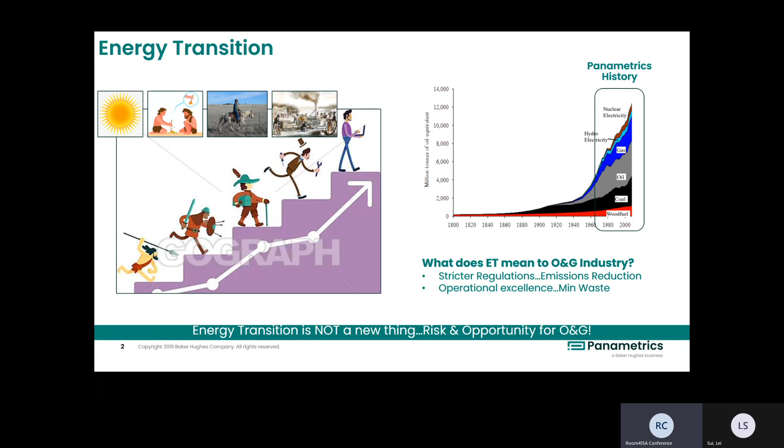That's exactly what I think flare.IQ can offer. As I said, by training, by nature, I'm not a salesperson, but I try to go through what's in my mind from a technology point of view. Next slide. Yeah.

So if you go to the website and search, those big buzzwords are all over the place. Climate fight, carbon footprint, and methane reduction. So on one hand, when we think about energy transition, we are thinking, hey, natural gas is going to play a bigger role moving forward.

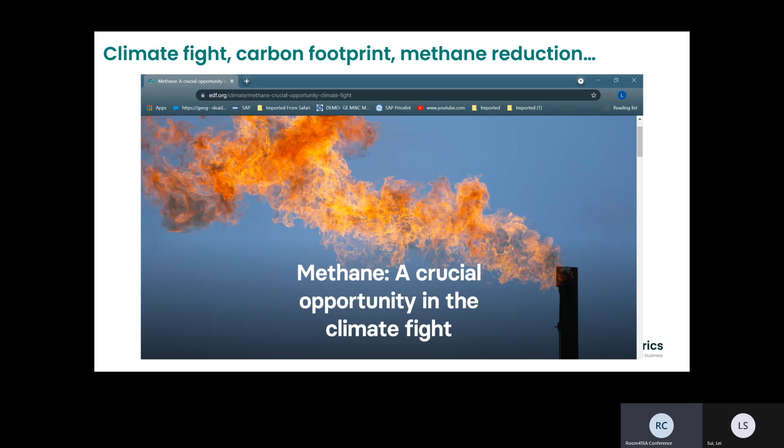On the other hand, we also think methane, that's bad. Well, we realize it's bad for a long time. It's just never to this order of magnitude, right? So what does that mean? So next slide.

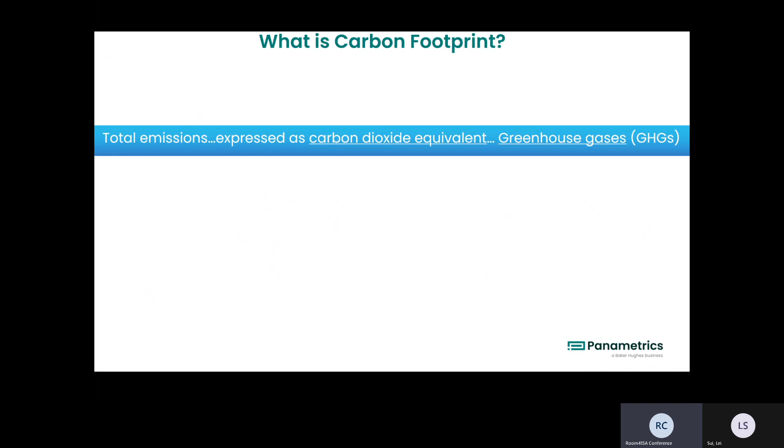So why are we saying a certain thing there, right? So I think that's really come down to the carbon footprint. And I think the carbon footprint is really the total emissions expressed as carbon dioxide equivalent, right? The major carbon footprint source for us is carbon dioxide and methane.

Methane is the major part of natural gas, basically, right? So when it comes to warming the planet, methane is much worse. In other words, methane has a much more warming power compared to carbon dioxide. Carbon dioxide is bad by itself, but this is at a different level, methane. That's really important for us to understand.

So it's 80 times more warming power compared to CO2 over a 20-year period, right? So then you think about where the greenhouse gas is coming from. Carbon dioxide is really 80%, and the methane is only 10%. But when you multiply by 80 times, or even 20 times, depending on the number of years you are looking at, methane is becoming a major problem.

That's why you read the news, so methane is bad, bad, bad. And there's a reason for that. Where does methane come from? There's many different sources of methane.

So right, natural gas, oil and gas industry is 31%. That's the largest. Then you think about enteric fermentation - that's the cows, the farms, the cattle, right? So that's why you read the news about reducing the consumption of meat, right? That's also part of that. There's landfill and other things there I'm not going to talk about. So oil and gas is focused here, right?

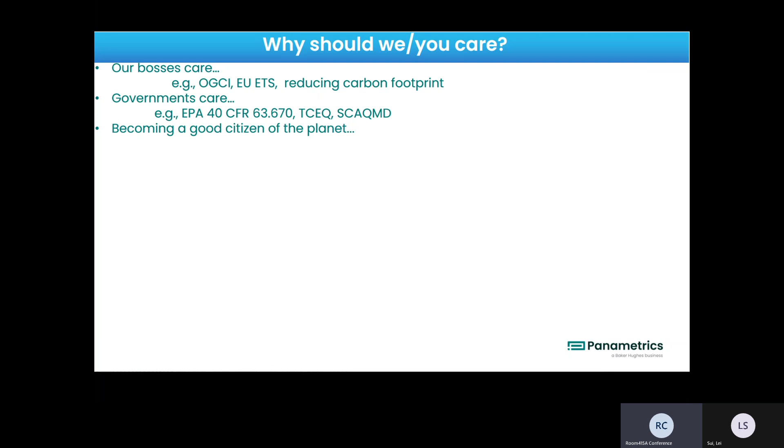So why should we care? Regulators and government really care about this. I'll reference some regulations there - MACT rule, TCEQ, different rules. You can read it yourself. I think everything comes down to how that's related to a flare system. That's what we are going to talk about today.

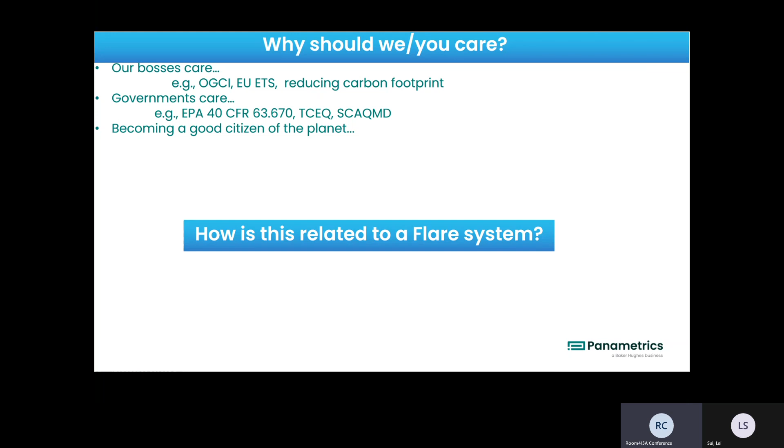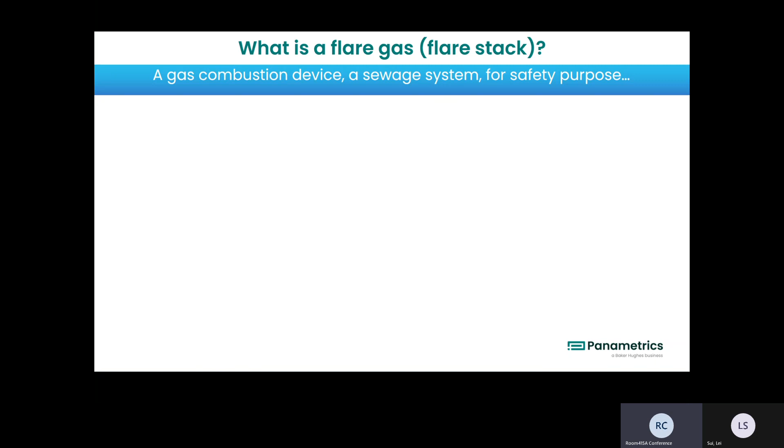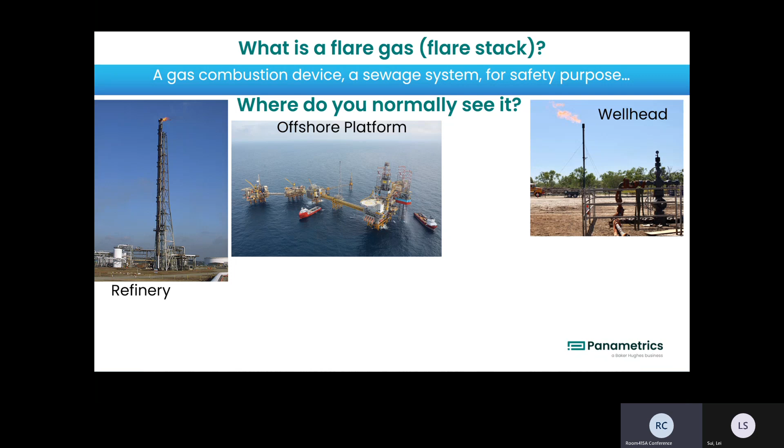If you think about it, a flare stack is really the sewage system of the refinery or petrochemical system. It's where anything you don't want goes, and eventually it will be burned. Where do you see that? Refinery, petrochemical, offshore platform, wellhead - that's the upstream thing we talked about. And keep going - chemical, and also LNG.

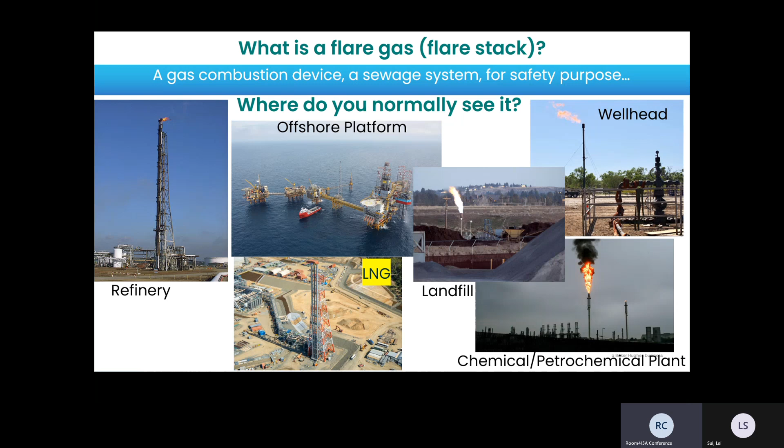Last time we also talked about pipelines, and Golden Pass, the LNG facility. There's one common theme - when it comes to those, and landfill is another one - they all produce methane one way or another.

So going down further, when you produce methane, there's only a couple of things to consider. If you think about methane as an equation, this is the schematic for an oil and gas plant, whether petrochemical or offshore - pretty much summarized like that.

You start with some raw materials - for refinery, it's crude oil. Then you go through different processing units, whether for jet fuel, gasoline, diesel, different things. Eventually those smaller flare lateral lines combine to a main header. You go through a knockout drum, flashback seal, all the way to the top, where you burn anything at the flare top.

That's the schematic. The reason I highlighted this is that's where the methane comes from - methane sources are from different processing units combined, and you also have some kind of purge gas, could be nitrogen, or could be natural gas with methane as well.

There's also part of the pilot - for the flare top, you need a pilot light, and you need to supply fuel gas to burn that. So all those are the sources there.

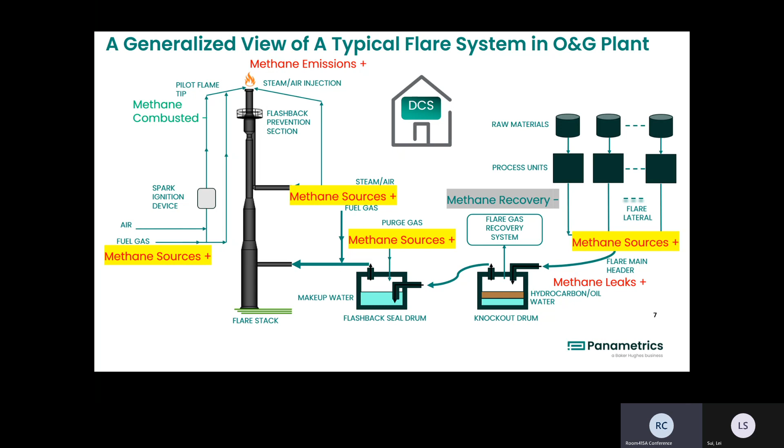So where is that methane going to go? A few things - it can leak, like from a valve that's leaking, then you're going to see some leak. And then also at the flare top, you are going to burn that.

So this is really how methane is balanced: the source minus the flare gas recovery system, if you have one - not every facility has one - then it will be burned, and anything left will be the methane emissions.

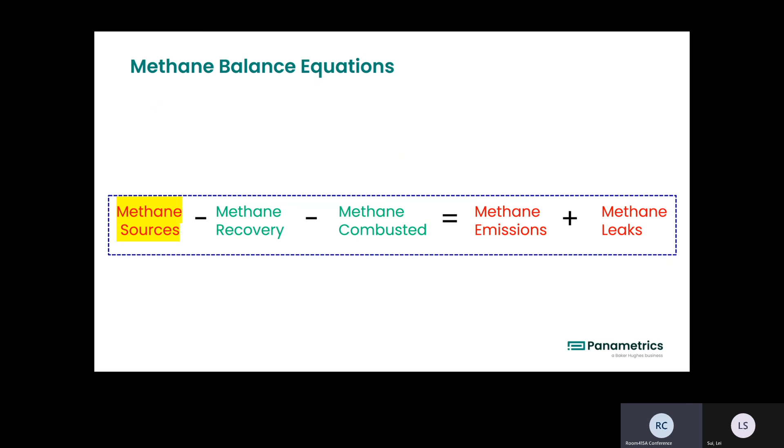Next, if you think about the combustion, it's pretty straightforward - methane is burned to become CO2 and H2O. As I mentioned earlier, this is bad enough by itself. If you are not burning that, it's much worse because of methane. If you're not burning it, basically it will escape to the air.

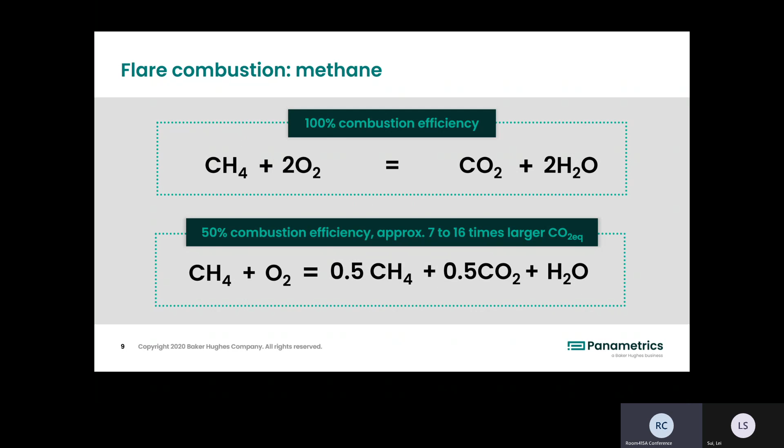Suppose you have 50% combustion efficiency, which really means 50% of methane goes to the air directly, and the other 50% will be burned. When you combine those two, that really means your warming effect on the environment is going to be much worse than 100% combustion. That's why all the regulators are seeking good combustion efficiency - there's a reason for that. If you don't, then that's a problem.

That's really the background. I'm going to skip this one and quickly go through some of the regulation history. There's an expert in the room, so feel free to chime in.

Historically, you can look at the history and say there's two general regulations. One is no black smoke is allowed - that's regulation one. So for operators, whether Chevron or Valero, when they think about this, they say, hey, in order to avoid black smoke, I'm going to inject steam. I'd rather be safe than sorry, so I'll inject a bit more. By doing that, you dilute the energy content inside your combustion zone, and the end result could be you reduce your combustion efficiency.

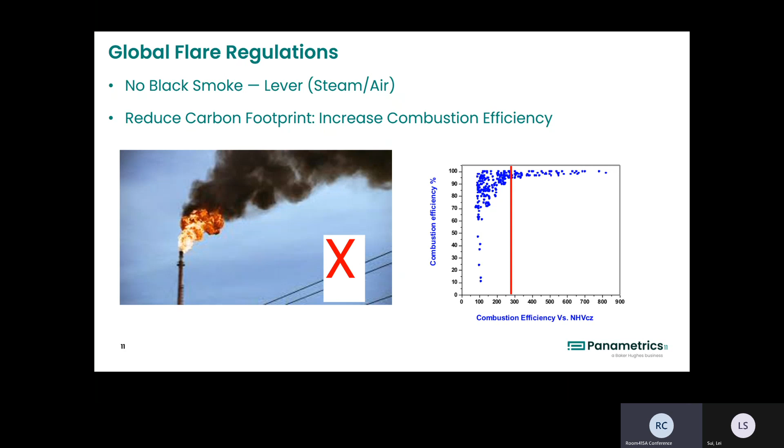EPA recognized that problem. So they said, true, there's no black smoke, but on the other hand, I need to make sure you have enough energy content in the combustion zone. That's where we start to have the RSR MACT rule - not only the other things I talked about, but also making sure you have good energy content in the combustion zone. That's why we regulate that.

The regulation is on the page, you can read it yourself, I'm sure you're all familiar with it. It really tells you a flare must maintain a minimum combustion zone net heating value, 270. That's the history, for refineries. As you all know, MACT is also coming to the petrochemical sector - by 2023, that needs to be implemented there as well.

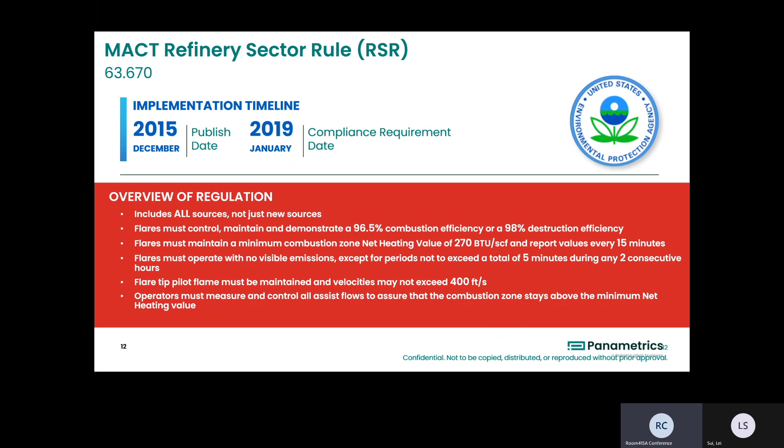So refinery first, petrochemical next. The regulation is very similar there. So that's exactly the journey of our thought process, how we are developing, how we can develop more than a meter and become part of the solution.

That's where flare.IQ comes from. There's 3 messages I want to deliver for flare.IQ. If there's anything you want to remember about flare.IQ, it's that flare.IQ is a platform. The way you think about flare.IQ is like your phone, whether it's an iPhone or Android, doesn't matter. It's your phone, and then given that platform, we build different apps on top of that. There are 3 apps I'm going to introduce today.

One, emissions control, which I'm going to talk about. The second one is called digital verification, which Victor will go through in detail as well. Then the third one will be monitor combustion efficiency. Those are the 3 things, and that's my whole main focus there. So then you'd ask, hey, why does Panametrics have something secret sauce to offer in this case?

I'll start with emission control, which is here. The deal is this: as I mentioned earlier, Panametrics is specialized in flare meter. We do flare metering for the last 40, 50 years, starting in 1980, so that's 40 plus years already. We know quite well how flare is operating at different refinery and petrochemical sites. We can output a velocity, volumetric flow, mass flow.

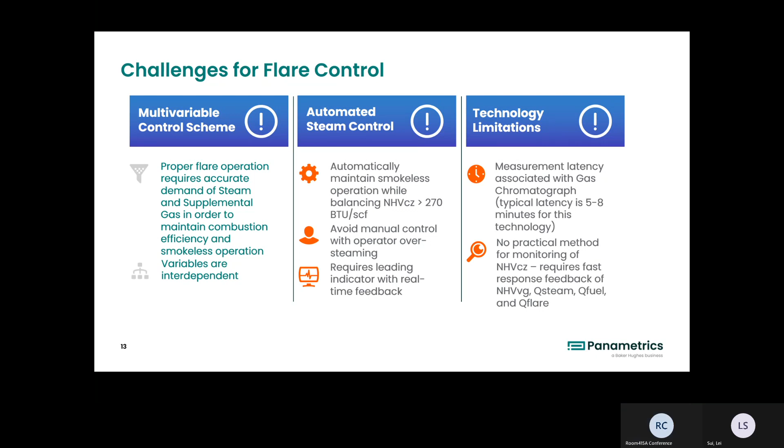So Mike briefly talked about it. Yes, okay, Mike briefly talked about it here. If you think about that, whether petrochemical or refinery, this is how it works there.

But in order to measure, you need to have some kind of feedback. Any control needs a feedback loop. So if your end goal is to make sure the combustion zone has a BTU value of 270 per scf, then how do you know you need to give more fuel gas or more steam? The way to know that is we utilize our molecular weight and derive the BTU value, using that as feedback for our control algorithm. It's much easier for me to say than done, for sure. There's a lot of algorithm IP behind it, but in a nutshell, that's what it is.

So that's why we say, hey Mr. Customer, if you install our flare.IQ into your DCS, we are not controlling any of your valves for fuel gas, flare gas, or steam. What we are going to do is be your advisor, your partner. I'm going to tell you at every moment how much steam you are going to need, how much fuel you are going to need, in order to do two things. One, be compliant. What's compliant? RSR called out the rules, I need to make sure I'm compliant. Secondly, I want to make sure you are very, very efficient to reduce your operational costs.

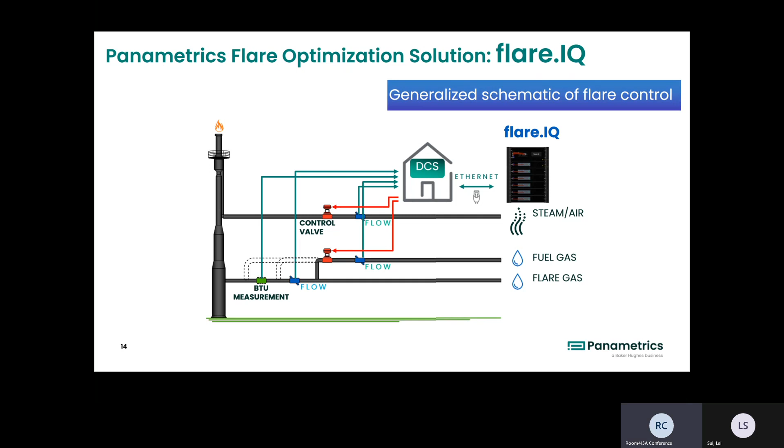Feel free to talk afterward about any details. The second piece I want to talk about is flare.IQ being like your iPhone. We build an app for control. Now how about the second piece? What else can you do with that iPhone? There's a lot of things we can do.

So Exxon, Valero, you buy our ultrasonic meter. Historically, you need to make sure your meter is working properly, so every once in a while you need to go check. Some vendors might tell you that you don't need to do any of that, but that's a dangerous statement. The analogy is like your annual physical check - that's how you know how healthy you are. Do you really want to skip that every year? That's your personal choice, but when it comes to your critical asset, which is our flare meter installed in your facility, how often do you want to do that?

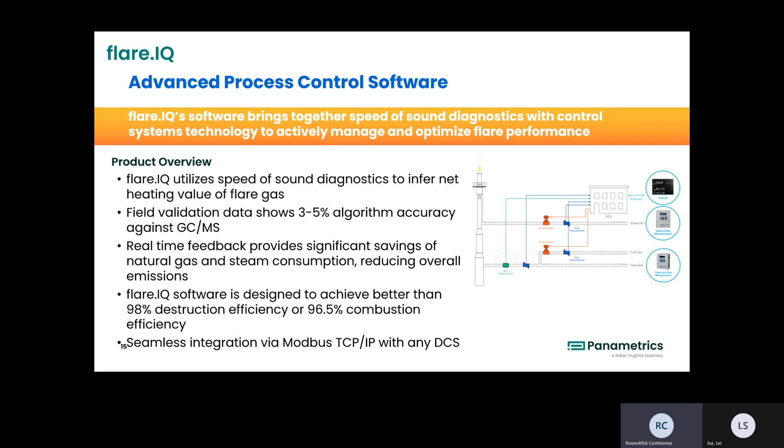Historically, we normally go there and check the meter on site. Sometimes you even need to build a scaffold to access those meters. So using the same analogy, leveraging the flare.IQ platform, now we don't need to do that anymore.

What you need to do is, almost like, hey, I need to monitor your heart rate, blood pressure, all the other things. On the other hand, I collect all that information. There's a pass-fail criteria on this flare.IQ box - there's an app. So for my height and age, 150 pounds is supposed to be the perfect weight, for example. If I'm already 200 pounds, it will tell you, hey mister, you've got a problem. The same analogy applies to our meter.

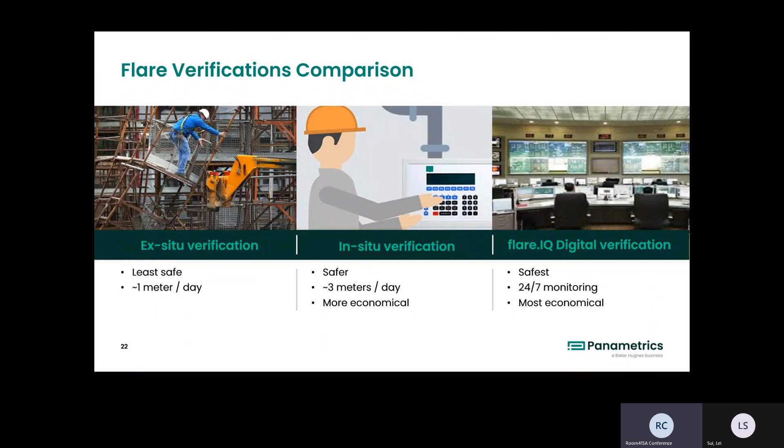So I think basically, let me show one example, go all the way down. I'll show one example of how it works there. More? Yeah, more, all the way more. This is the digital one, right? So I think this one might cover it. Go ahead, next one.

So for example, this is what you are going to see out of our app. This means we know our meter. So for example, if I'm the transducer installed in your pipe, if the background noise is very loud, or my voice is getting weaker, by knowing that, we can say hey, too much noise, so you can't make a reasonable measurement. And this will tell you whether you pass or fail.

In the future, which is not available yet, we want to make sure we can do more proactive, predictive maintenance. So, hey Mr. Customer, in 2 months your transducer might need some maintenance because your signal is really decreasing. But for now, what we can offer is a digital verification so that I don't need to see a doctor - that information will be sent to the doctor. The doctor evaluates me and says, hey, you're good, or there's something you need to do.

Question: Doesn't the existing Panametrics controller have this feature built in, some kind of fault diagnostics? No, but I think the existing meter offers all those diagnostic parameters, like signal strength - those parameters are available. There's just no intelligence algorithm to tell you whether they're good, bad, or otherwise. That's where the app comes in to do that. Good question. And I think that's the digital verification.

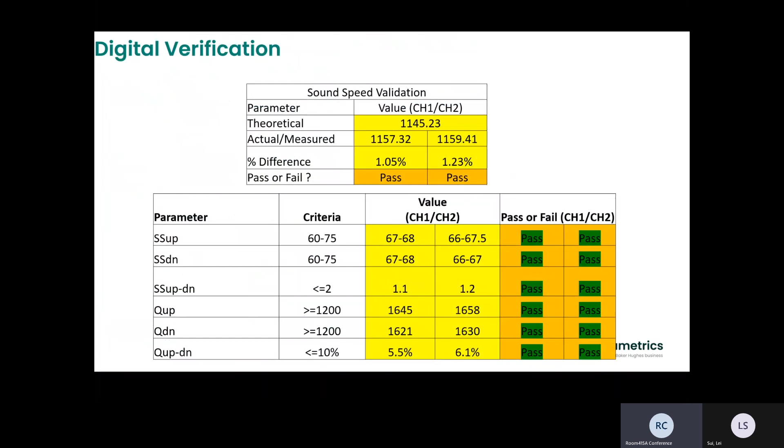Can you go back to the combustion efficiency? So the last feature - I said there were 3 features. I talked about flare control, I talked about digital verification, and this last one I'll talk about now. For upstream, there's no air assist or steam assist, so what can flare.IQ bring to the table? What can we do? Today there's an industry gap. I don't pretend we have a solution or a perfect answer, but I think this is a first step at it.

When you think about upstream flares, like a wellhead, you basically burn whatever comes down the line - there's no air assist or steam assist. So the real question is, how do you know how efficient you are at burning that waste gas coming to the flare pit? The answer is, we don't know. As an industry, we don't know. You might say a certain flare pit manufacturer tells you what efficiency you're having - that's called the emission factor you might be using, but that's not real time. It's more of a theoretical value, probably preset at 98% in general - a fixed value, not real time.

So imagine how can we be so sure about our emission if we don't even know the combustion efficiency? This is the type of problem to solve, right?

I think, of course, the most critical thing is to make sure you have a pilot flame that's running all the time, burning, right? That's the first step. You need to make sure it's burning all the time. Then we talk about, hey, how efficient you are burning.

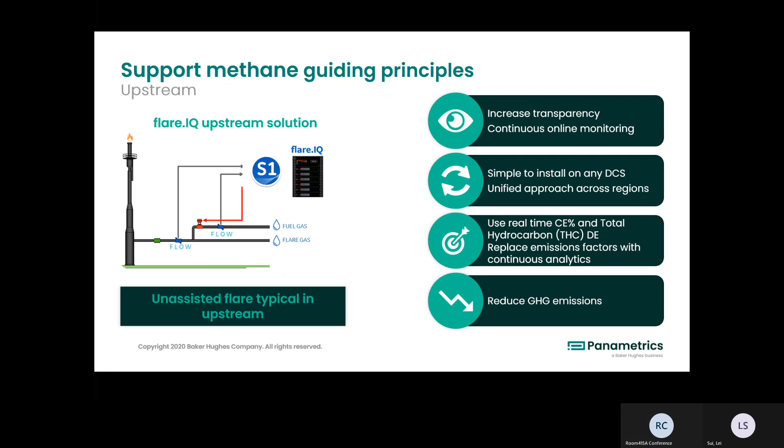So can you go to the chart on the efficiency? So we developed that, we implemented that in our flare.IQ. We also went to one of the European operators, and we partnered together to see, hey, what kind of comparison you can have out of it.

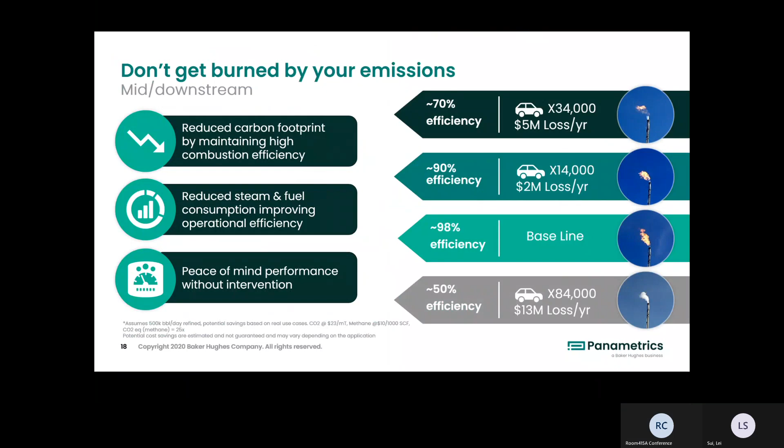So what we did there is, in this case, they have an FPSO, so basically an offshore flare. And we use our flare.IQ algorithm to give their combustion efficiency. Let's go forward towards the end... yeah, that's right, stay right here.

So then you must be asking, what's your golden reference, right? As some gentlemen discussed yesterday, there's no golden standard to measure combustion efficiency at this very moment. There's a couple of things available besides flare.IQ. The other one is the camera - basically, you use an infrared camera to take a picture of the flame at the top.

So basically, you use infrared, then you can use the absorption spectrum of that infrared picture to derive the carbon dioxide and other hydrocarbon that's not burned. Based on that, you derive back what kind of combustion efficiency. Think about it - your hydrocarbon comes in, it will be burned, becoming carbon dioxide and leftover. So by taking an infrared camera image, I derive what's the leftover, what's the carbon dioxide. Then I back-calculate what kind of combustion efficiency I have, right?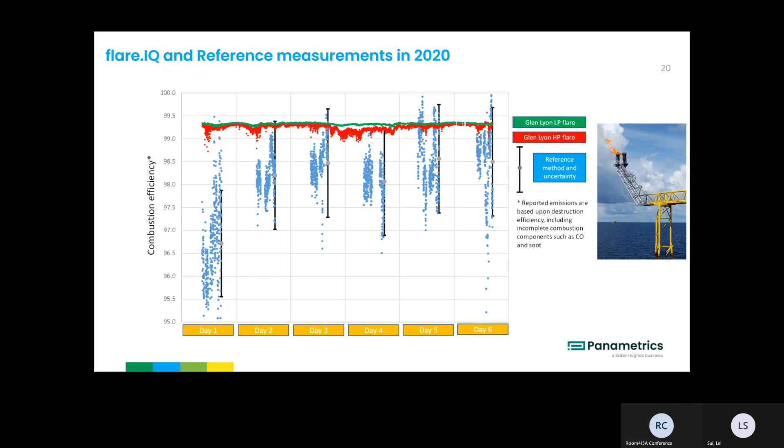I'll just say this—for ours, knockout for liquids to go through, there's usually a knockout drum, but sometimes if liquid gets in, it'll generate black smoke just for a second. So I know this is different, but a knockout drum will knock out water. Okay, yeah, that's a good point.

I think what you're talking about brings in the conversation about other factors—on the nitrogen side, yeah, you can definitely compensate it, though it doesn't usually tell you in seconds. At the same time, what I'm more thinking about is that you have more or fewer people, and they have their own inherent behaviors—they're not exactly the same. One needs 0.7 and another needs 0.5. How to account for that, I think, is probably more of an art. And that was the approach.

Yeah, I think there's work in the process we are doing now. I can't share much more because there's IP related there, but I can tell you directionally we are thinking of factoring the design of the flare tip into our model. There are a couple ways you can do that—CFD is one of those, for example—to make it more accurate without releasing more details. So you see the direction we are trying to think of.

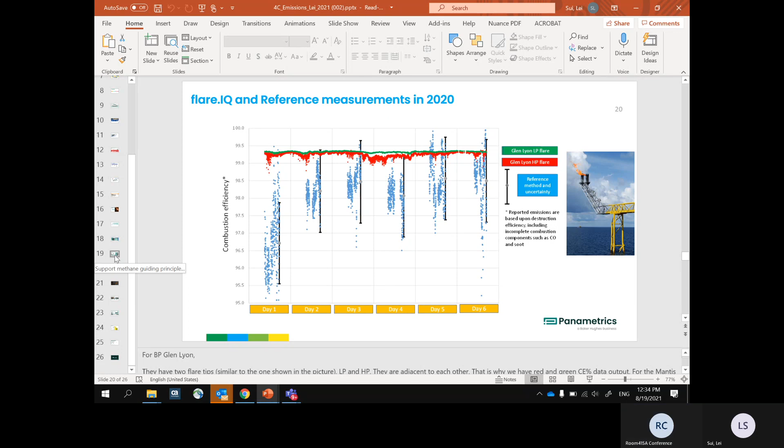When I say 10, for example, one major operator might have many—we just tried the first one. That's 10 in the pipeline, and there are many others in the pipeline as well. So it's certainly not new, but I think over 4 years of this journey we have gone through, and it's quite promising. Of course, we'd like to work with Exxon on some of that—there's nothing to lose, in my view, to try that. So whether it's the first generation, second generation, or third generation, it depends on what you have there.